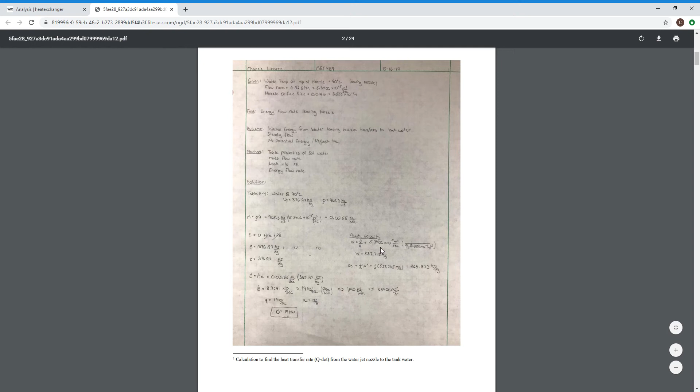So to test that number, I used it in a couple other analyses. If that was really the energy transfer rate from the jet to the tank water, it would take about 8.3 hours for the tank water starting at 68 degrees to reach 100 degrees, which seems realistic to what I've seen. It does seem like 100 degrees in 8 hours.

It probably wouldn't be quite 100, it'd probably be like 88 or 90. But that makes sense because I neglected all other heat transfer. I assumed all heat transferred from the jet to the tank. So after 12 hours, it would be 115 degrees.

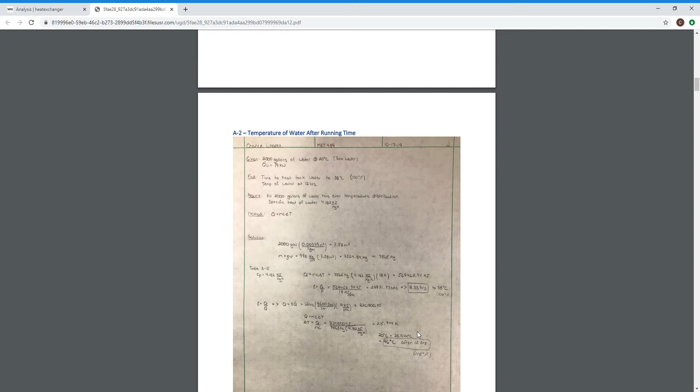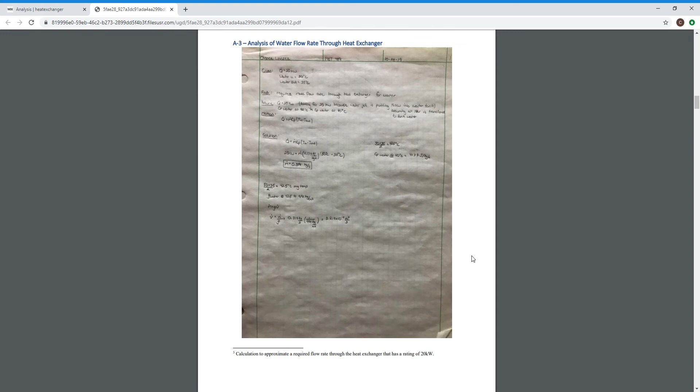So for this number to use, 19 kilowatts, I just went with 20 kilowatts to base all my other analysis off of, such as I'm already given a mass flow rate, or a flow rate for the pump, so using that variable and what the heat transfer rate needs to be, I could figure things out such as surface area, volume flow rate for air, and things like that.

So this project's requirements I set as: it needs to keep 2,000 gallons of water below 100 degrees, needs to run 12 hours a day at minimum. Ideally, this will work best when it's running overnight when the jet's not being used, so it can actually pull heat out of the water while heat's not being put into the water.

If it's being used while it's running, hopefully it would just keep it cooler. This needs to be able to maintain cooling in ambient temperatures of 40 to 100 degrees, so it needs to be able to be used when it's that temperature outside. The flow rate is 3 to 5 gallons per minute. The entire unit must not be larger than 48 cubic feet, because if it was any larger than that, it really wouldn't be movable.

The reason it needs to be movable is it can be pushed outside to let all the heat outside, but also during the winter it can be put in other parts of the building, and the water can be pumped and heat released in another room, keeping the manufacturing floor at a cooler temperature while putting heat in other areas that may not have as much. There's many more analysis that can be seen here by clicking all green sheets.

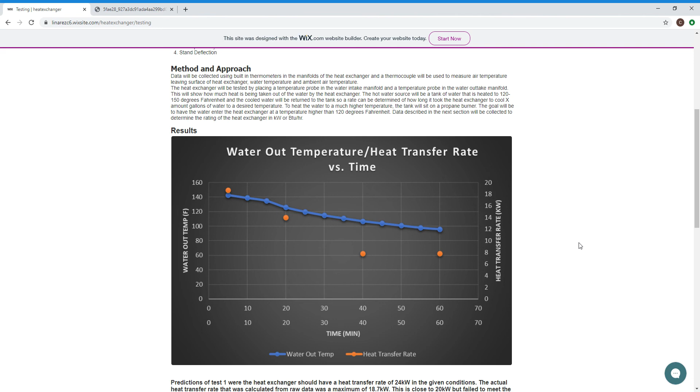There's also a test that was done, I did a pressure test and a stand deflection test to test if the stand could handle all the weight of the water and the rest of the unit.

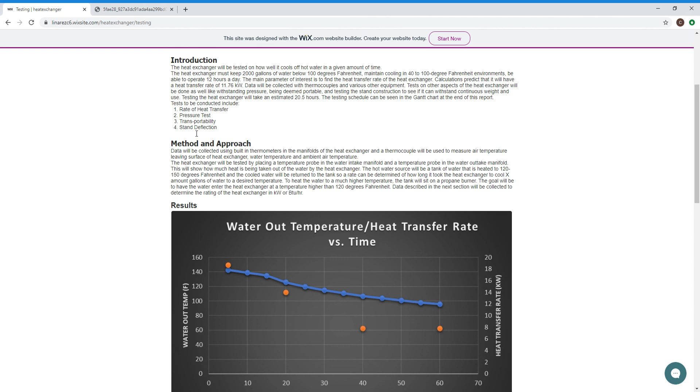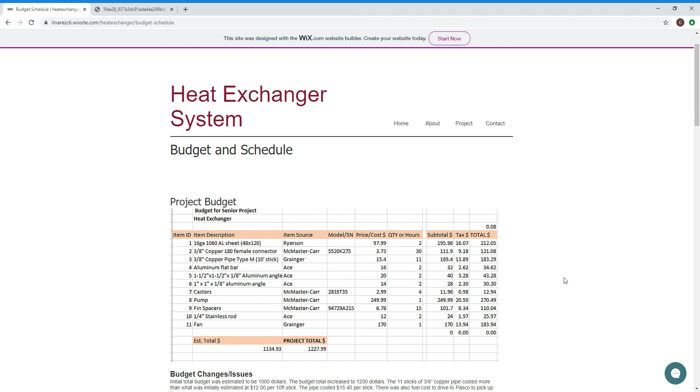For budget, it was about $1,300. I came in a little under that, at around $1,200. I didn't actually have to spend that much -- a lot of the materials I already had in possession, and a lot of them were given to me.

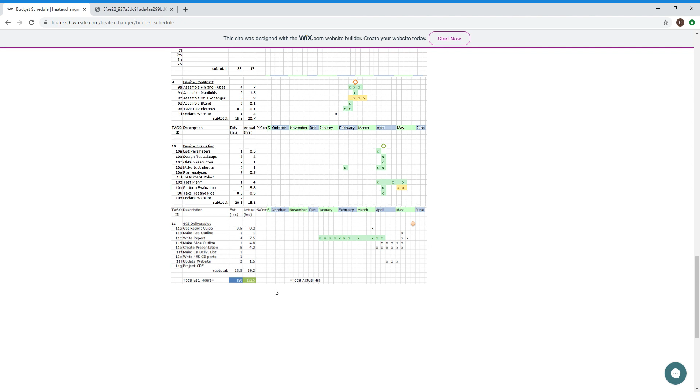Schedule-wise, I initially estimated 180 hours. It ended up coming in at about 160, so I was actually 20 hours under what I thought it would take.

On the last page here, I have my contact information, and my full report can be seen on the front page here. So thank you for watching, and thank you.